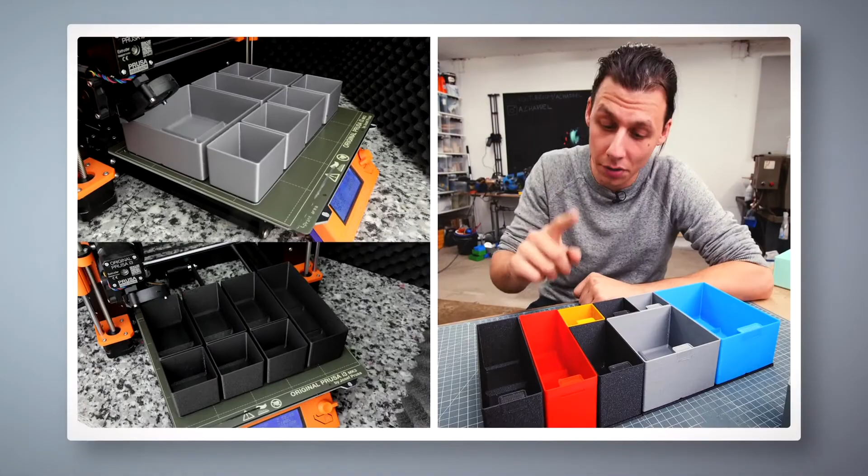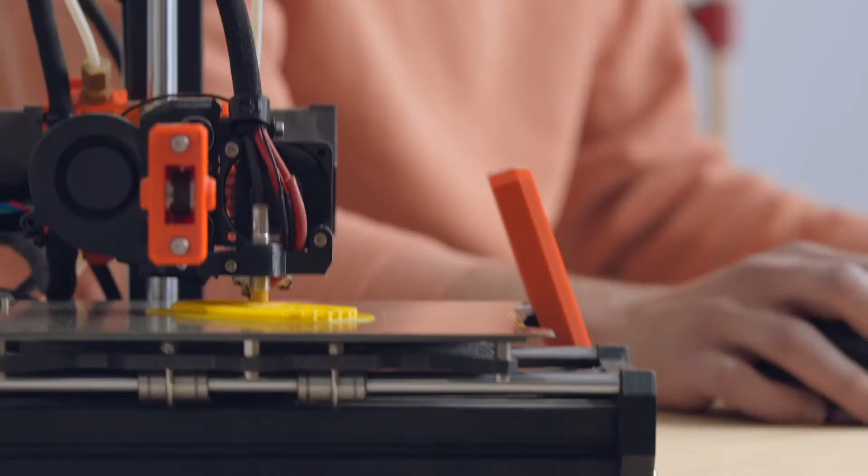3D printing is often thought of as not being very functional, but I'm here to show you that it can be useful for so many things. The trick is to break down the design of the object into its single components, so that we can combine 3D printed elements with more traditional materials to create both stylish and functional objects.

Whether it's out of necessity or following inspiration, I have an urge to take my ideas, turn them into something concrete, and then share them with the world.

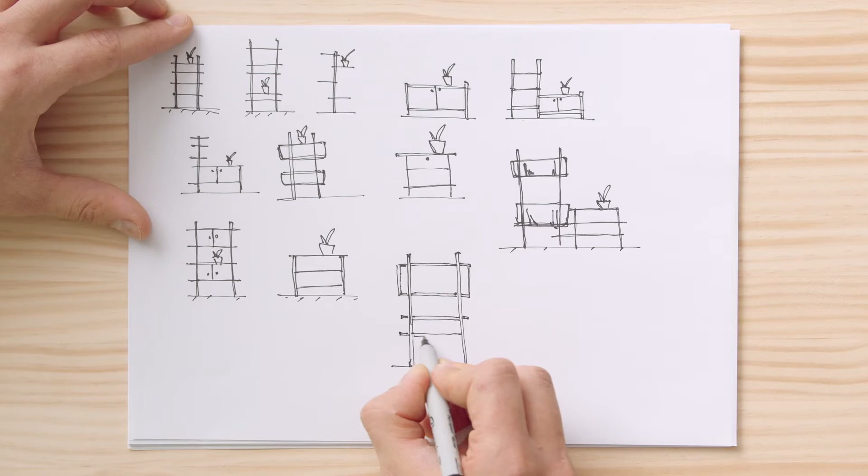In this Domestika course, you'll learn how to use and combine techniques such as 3D modeling, 3D printing, and some simple woodworking to turn your idea into a finished product. As your final project, you'll make a modular shelving system for your home.

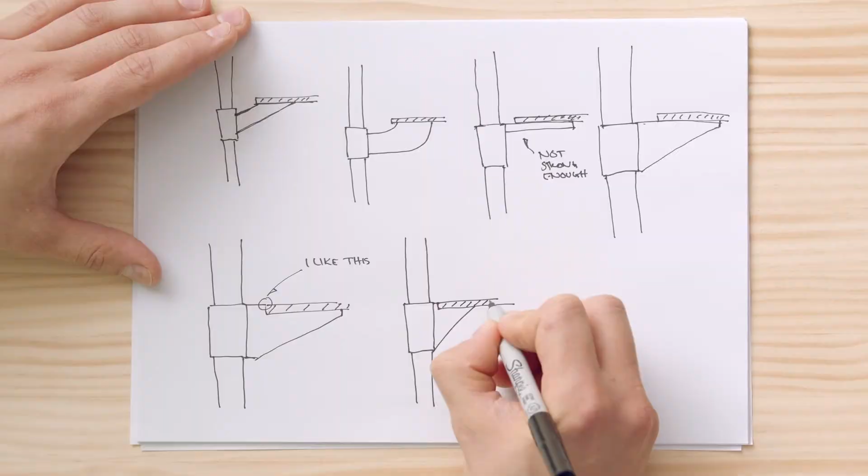We'll learn what 3D printing is and the different ways to get 3D models. I'll show you how to turn your inspirations into sketches, how to test proportions using mock-ups, and how to create a final design with measurements.

We'll learn the basics of 3D modeling using Fusion 360. We'll design the different parts of our project, and we'll take into account the interaction between the different materials.

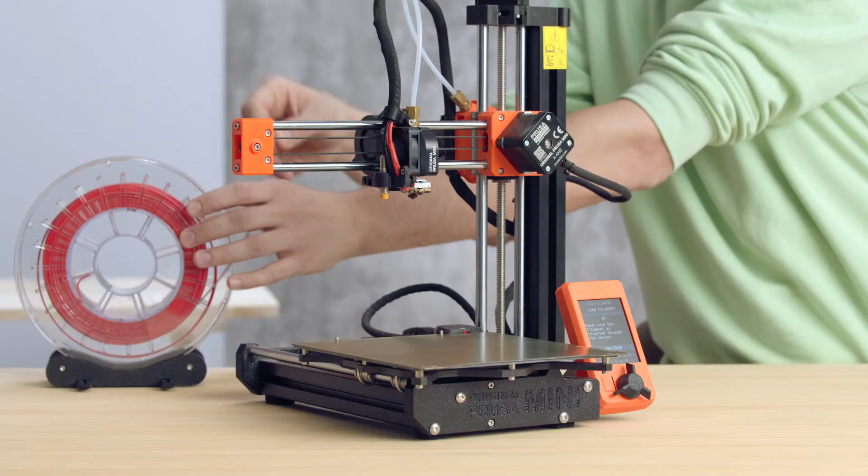Once we've made our 3D model, I'll show you how to use a slicer to send our parts to the 3D printer. We'll make sure that everything fits properly, and then we'll print the pieces for our final project.

Finally, we'll cut our wooden parts to size, sand them, and apply a protective coat of oil. Then we'll assemble all the components.

By the end of this course, you'll have a basic understanding of 3D modeling, 3D printing, and some woodworking. To follow my lessons, all you need is access to a 3D printer, some basic woodworking tools, and a computer.

Mix craft and technology and create your own customized pieces of furniture for your home.